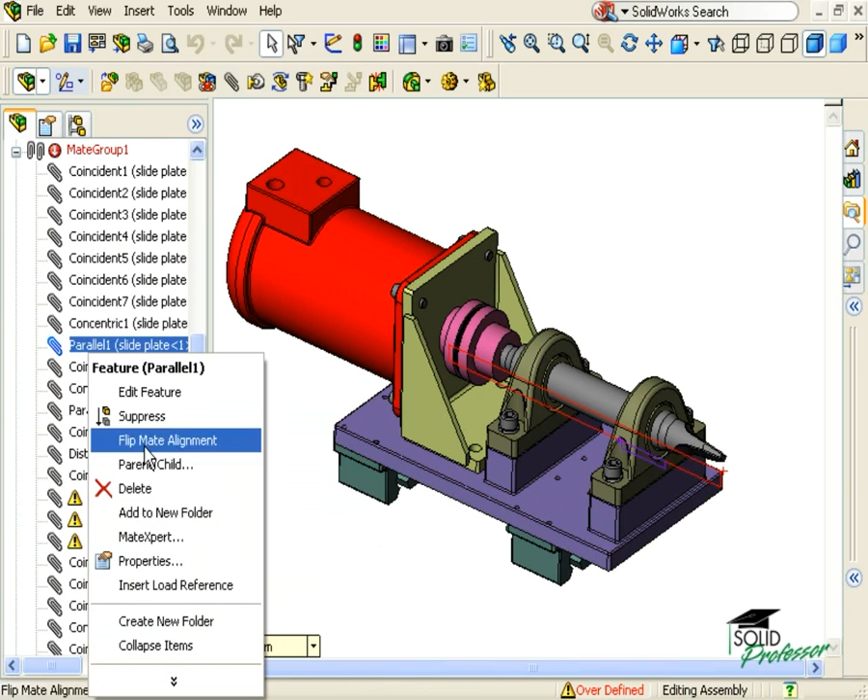Another tool available through SOLIDWORKS Intelligent Feature Technology is the Mate Expert. The Mate Expert helps you avoid mate errors and simplifies the process of troubleshooting mate errors in assemblies. To launch MateXpert, click Tools, MateXpert, or right-click the mate group, or any mate in the mate group, and select MateXpert. The Mate Expert Property Manager will appear.

Begin by clicking the Diagnose button. This will analyze any mate errors and organize them into subsets. Within each subset, you will find mates that relate to the same problem. This is very important. By collecting related mates, you can easily review each one and decide for yourself which one should be edited or suppressed.

Each subset will present different information. For example, this subset contains all mates relating to a specific error. It also reports, here in the yellow field, that planar faces are parallel, but their alignment is reversed. This is a pretty clear indicator that the alignment of this mate needs to be flipped.

To correct errors, right-click on a mate, and you'll have the option to edit or suppress a mate. In the case of a misaligned mate that is not satisfied, you will also have the option of toggling the alignment. In this case, I'll right-click the parallel mate and select the Toggle option. Often correcting a single mate error can have the effect of correcting multiple mate errors.

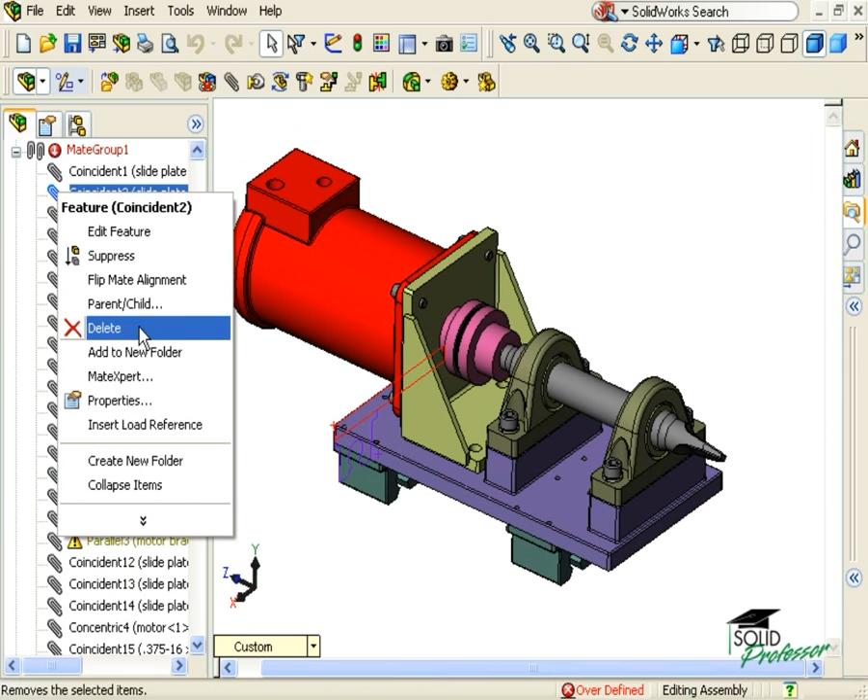I'll click OK to conclude this Mate Expert and rerun it to see what changes have occurred. This time, only 2 subsets appear. I can continue to inspect each group and decide either to edit or suppress any of the mates, but for now, let's turn to the section labeled Not Satisfied Mates, here at the bottom of the Property Manager.

This section will list any mates where the geometry does not reflect what the mate dictates. In this case, both of these mates are not satisfied. In the case of a coincident mate that is not satisfied, SOLIDWORKS reports a small distance between entities that should be coincident. In case of the concentric mate, SOLIDWORKS reports that there is actually a distance between the centers. Here again, I can right-click any mate listed and either edit or suppress it. But let me show you another approach.

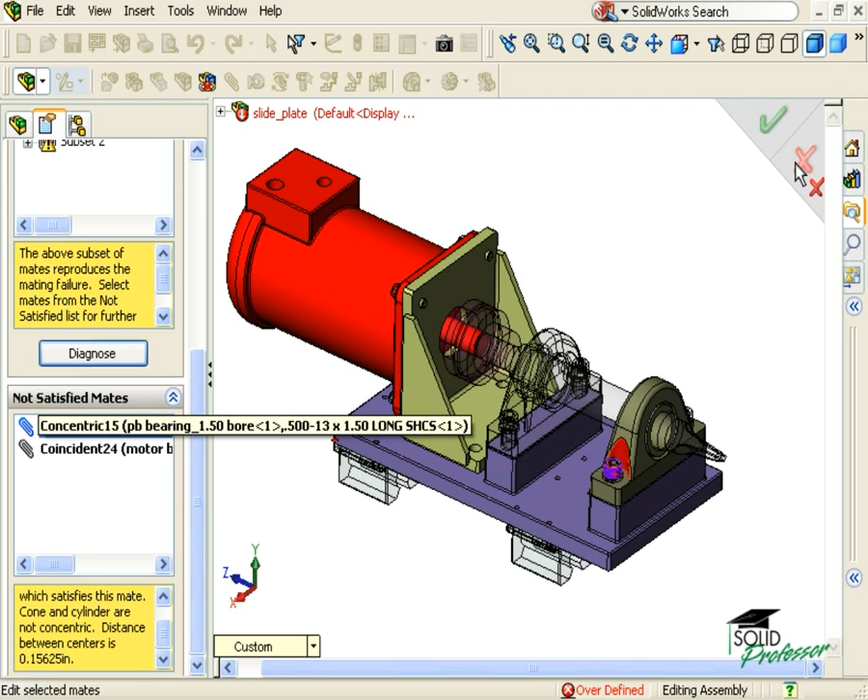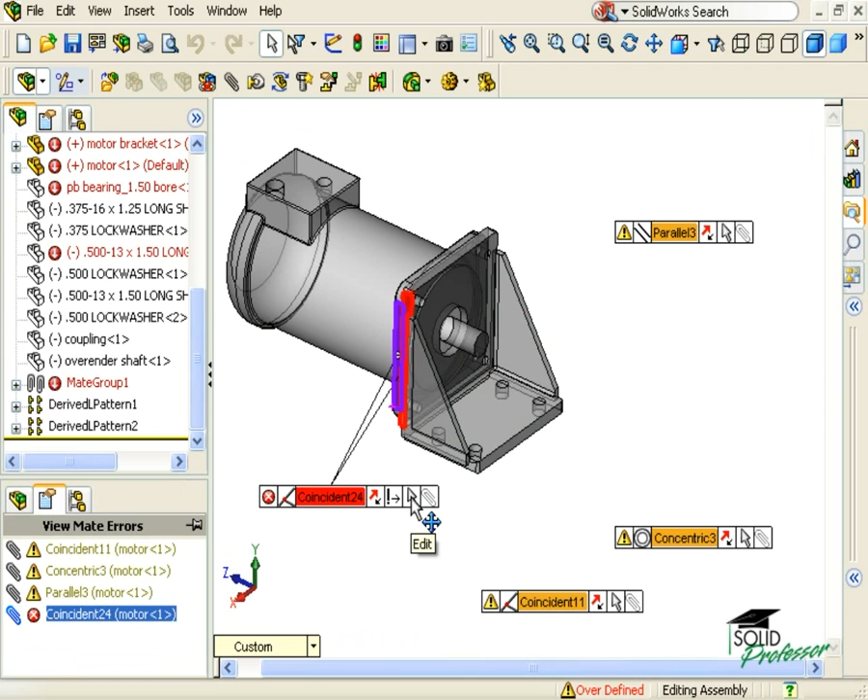Now, I'll go ahead and get out of this Mate Expert. And to see these mate errors graphically, I can now click on the text that says Overdefined in the status bar. When I do, flags will appear, pointing to the mate sets that are conflicting. Each flag tells you what's wrong with the mate, what kind of mate it is, allows you to flip the mate alignment, force the mate, edit the mate, or suppress the mate.

For the coincident mate, we saw a moment ago that there is actually a small distance between them. Perhaps instead of being coincident, this should just be a parallel mate. To edit this mate, I can either click on the arrow icon, or right-click on the flag and select Edit Feature. When I do, the Mate Property Manager appears where I can make the change. When the mate is complete, I'll click the Overdefined text once more to see the final mate error.

In the case of the concentric mate, we saw a moment ago that there was actually a small distance between the centers of the unsatisfied mates. But which of these mates is correct? Well, if I click on each flag, I can see the entities highlight that are trying to be mated together. Common sense tells me that the screw should be mounted with the hole, rather than the cutaway.

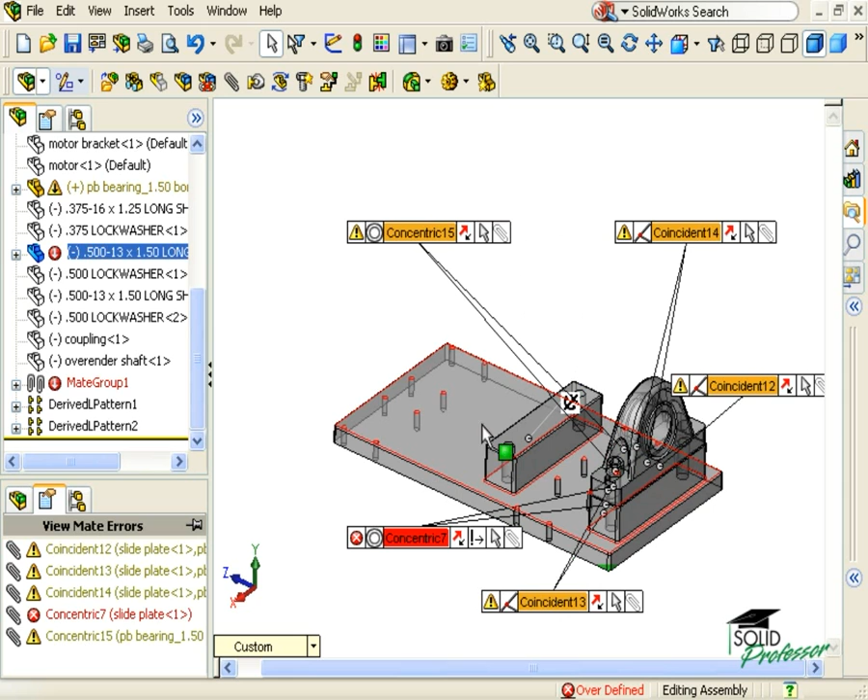But just to be on the safe side, let's force the mate to be concentric with the cutaway to see the effect. To do this, I'll click the Force Mate button on the error flag. As soon as I do, I can see this causes numerous other warnings, and an error with our other concentric mate with the hole. This is obviously not the result we're looking for. To get back to where we were before, I'll click the Undo button, and click Overdefined one more time.

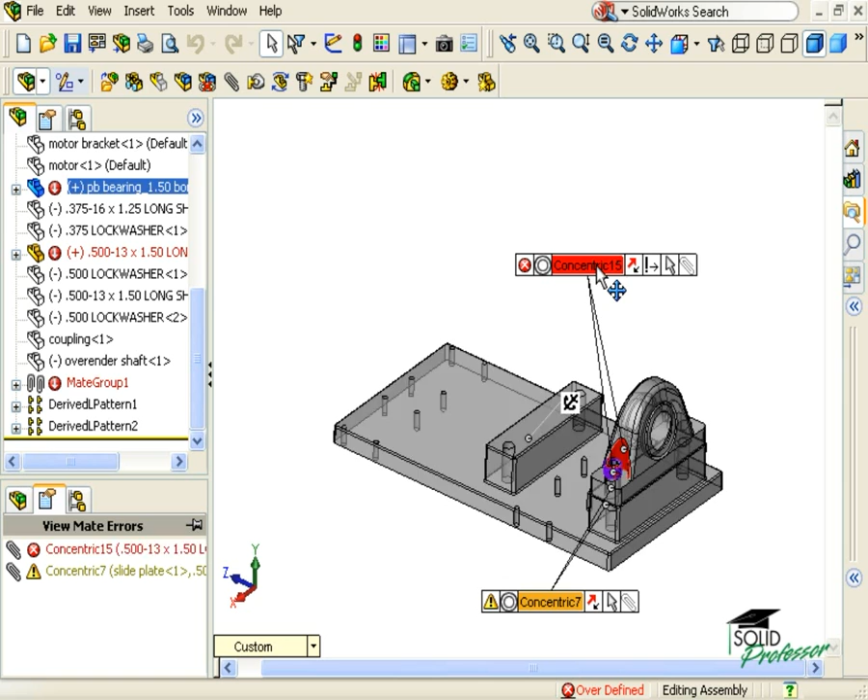In the case of this concentric mate error, it appears that this is a redundant mate and is not necessary for the placement of the screw. To get rid of it entirely, I can right-click on it and select Delete, or if I just want to suppress it, I can click on the paperclip icon and all of the mate errors will be fixed.